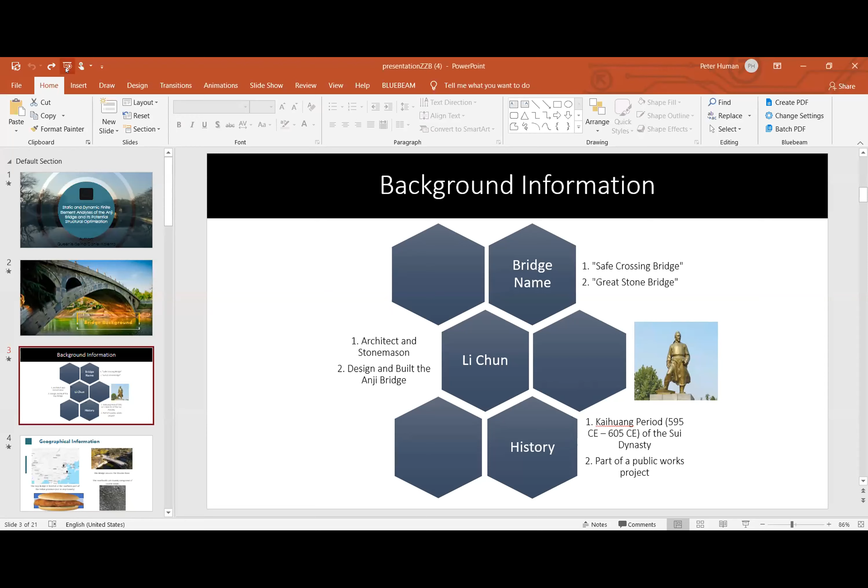All right, here we go. We have seen this slide. This is basically the bridge, and that's our topic. I'm going to talk about the background information of the bridge.

Now we start. So the bridge basically has two names. Some people call it Anji Bridge because the literal translation from Chinese is the safe crossing bridge. And also because the bridge is made out of a lot of stones, literally all the components are limestones, and they're compacted together, so it earns another name of Great Stone Bridge.

And also, we have this guy here. This guy is called Li Chun, and he's basically the architect. He built this bridge as well as planned everything about this bridge, and he's also considered, I guess, the father of the bridge.

And afterwards, we have the history of the bridge. The history is basically during the Kaihuang period, which lasts from 595 to 605 CE, and basically after the decline of the previous dynasty, they tried to restore the whole process of public works. So they built this bridge for everyone's benefit.

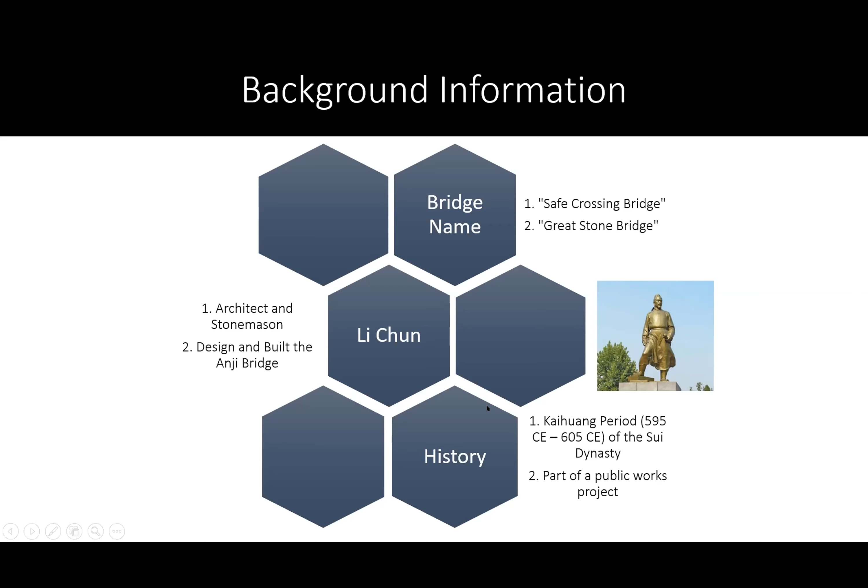Okay, now we have this geographical information here. So basically the bridge is located at Anji, in Hebei province. I've got no idea why this one doesn't work, it should play slide by slide, but

okay, so basically this is a map of China, right? And then now we have Hebei province here, and the Anji Bridge is located inside of it. And don't get confused, because there's another place also called Anji, located in Zhejiang province. Even though it's called Anji Bridge, it's because of its name of Safe Crossing Bridge.

And also, this bridge basically crosses the Xiaohe River, and by the bank side of the river, they have very coarse stones and sands, and they are very incompressible because they basically have a layer of silty clay as well as a layer of silty sand, distributed equally. And because of the property of the silty clay, it's very hard and incompressible. It basically supports the bridge quite well.

So even when it has experienced floods or earthquakes, it still won't fundamentally destroy it at the base, because liquefaction of the soil cannot happen. And unfortunately, I've got no idea why this slide doesn't work.

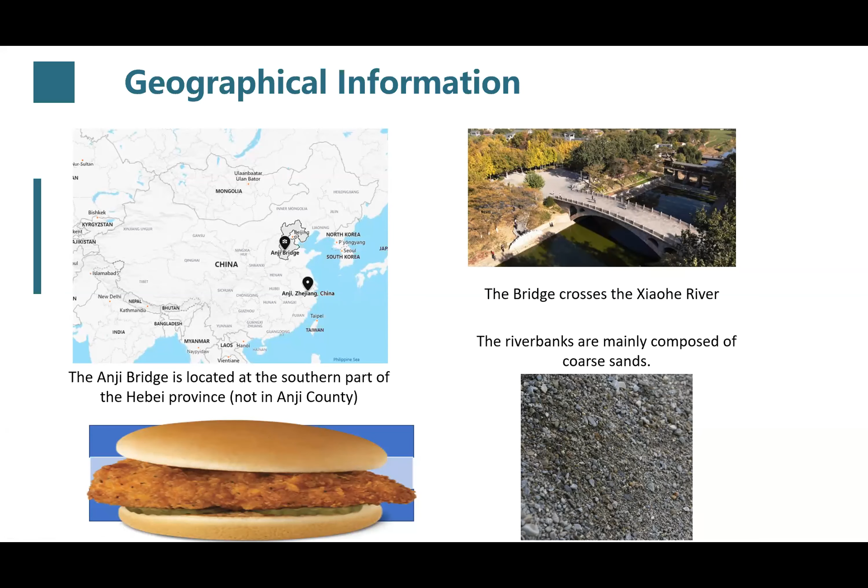And yeah, so if we have a bridge on top of this, and the silty sand and silty clays are incompressible, you can't compress them. So basically, they're going to be stable. The bridge is going to stay stable on top of it. And you can skip. I've got no idea, the slide doesn't work.

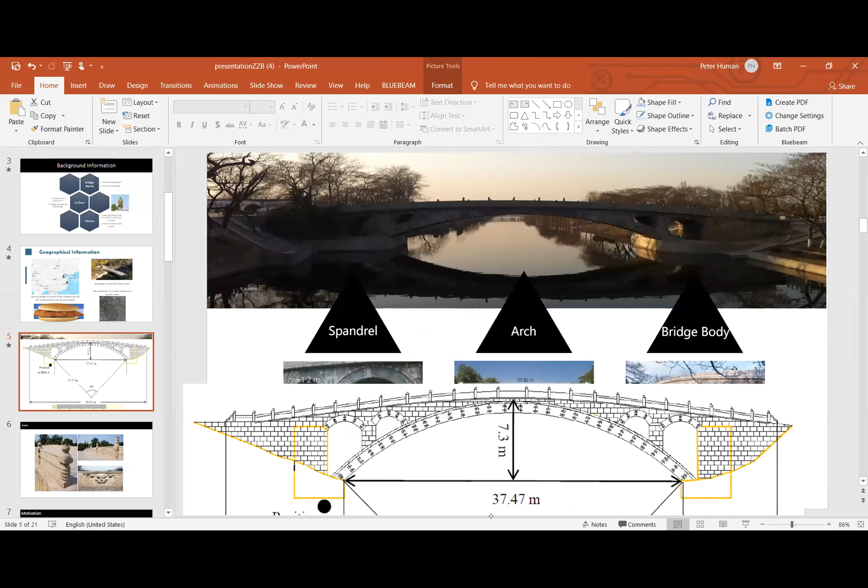Okay, so basically what we have here is our whole entire bridge. And I would like to talk about the spandrels. The spandrels basically are symmetrical. So we have both sides. On each side, we basically have two.

So we literally have four open spandrels, and they function quite well, because during 1,400 years of this bridge's history, there have been numerous floods. So the spandrels basically open up space for the water to pass through by almost 16.5%.

And also, this is a smart decision, because during an earthquake, you want to have less material. So basically, this saves about 7.85% of materials. Basically means 700 tons of limestone saved.

And I would like to talk about the arch. So the arc length is going to be 37.02 meters apart for the spans, and the height is going to be 7.23 meters. The width of the bridge doesn't really matter, but it's 9 meters.

So if we compare this bridge to another bridge which has a semicircular shape, this bridge only cuts an 83 degree angle from the whole circle. So if you were to imagine there would be a circle down here, this is only going to be 83 degrees of that angle.

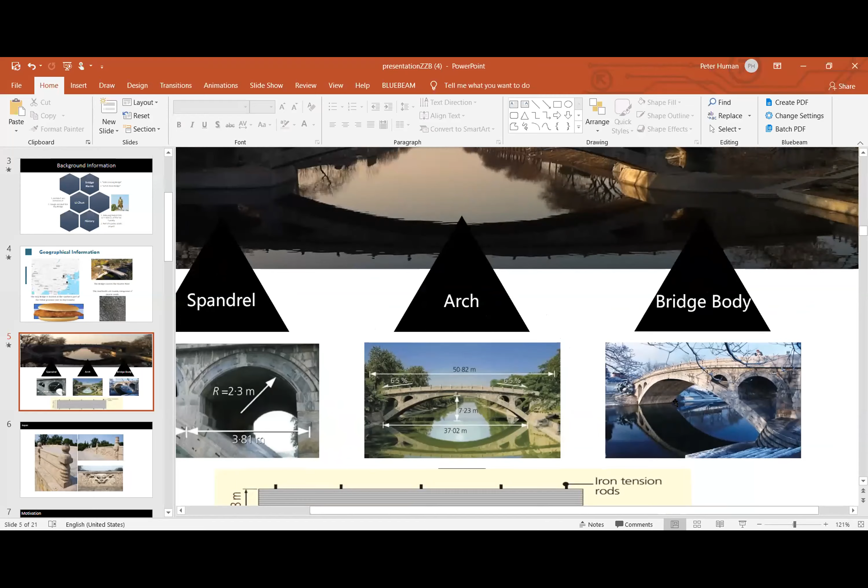And then I'd like to talk about the bridge body. So basically we have the bridge here, right? But if I were to zoom in, you could probably see the bridge has a lot of components. It's basically made out of 28 pieces of limestone, and they are compacted together. And we have another image here that shows it clearly.

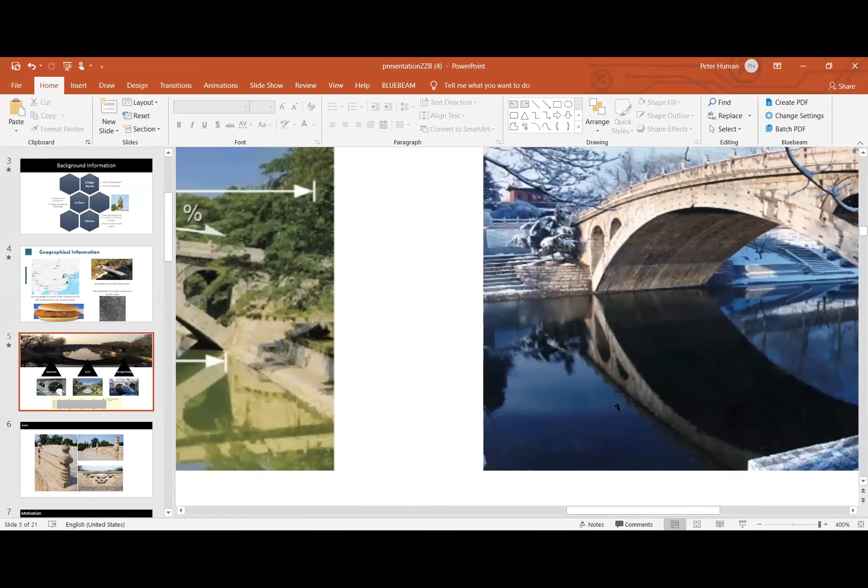So basically this is a bridge, right? And then they bend this bridge, but it's still going to be the same part. It's going to be 28 pieces of limestone, and it's going to be compacted with the iron tension rods.

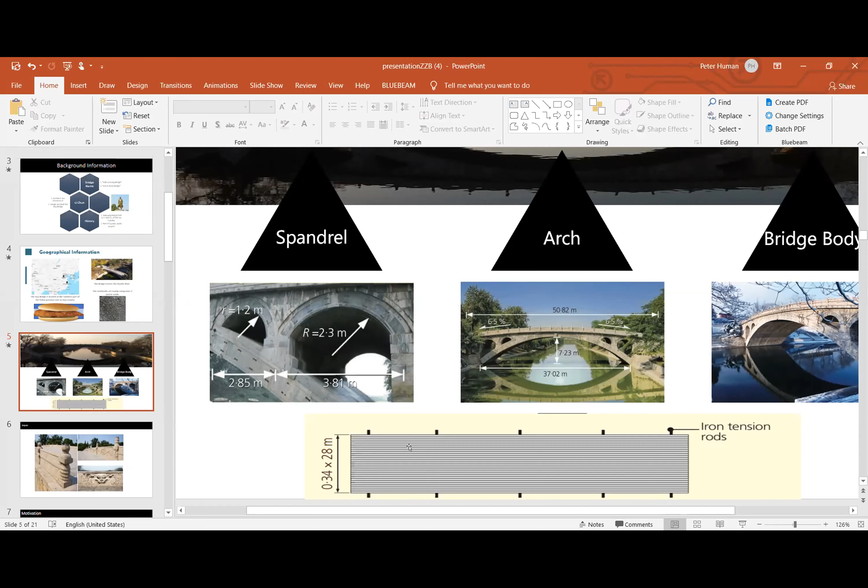So if they have this structure, it's a real advantage, because if one piece breaks, they can easily replace it as well as repair it. One piece breaking doesn't cause the whole structure to collapse.

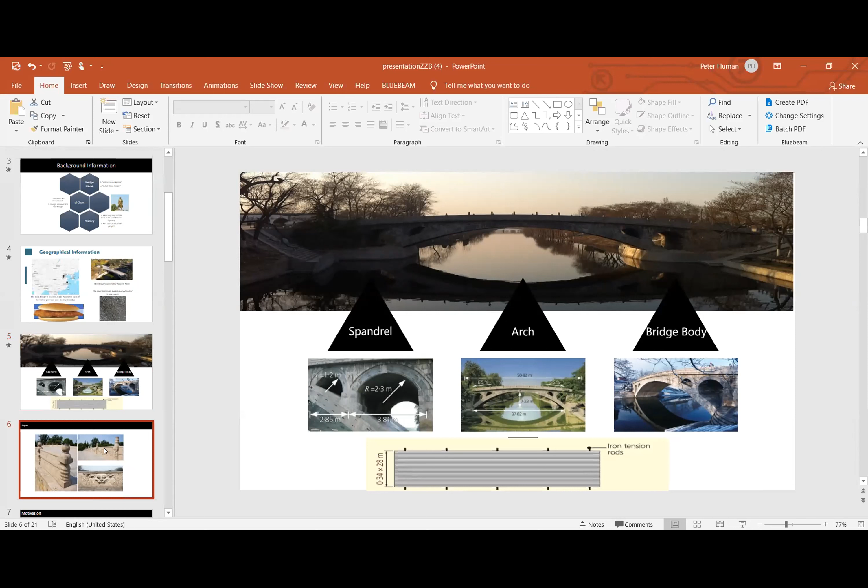And last, I will talk about the repair of the bridge. So the bridge is basically 1,400 years old, right? But this bridge is stable. It never collapsed. Even though they need more stones for repairs, there hasn't been any major issue with the bridge except the ornaments.

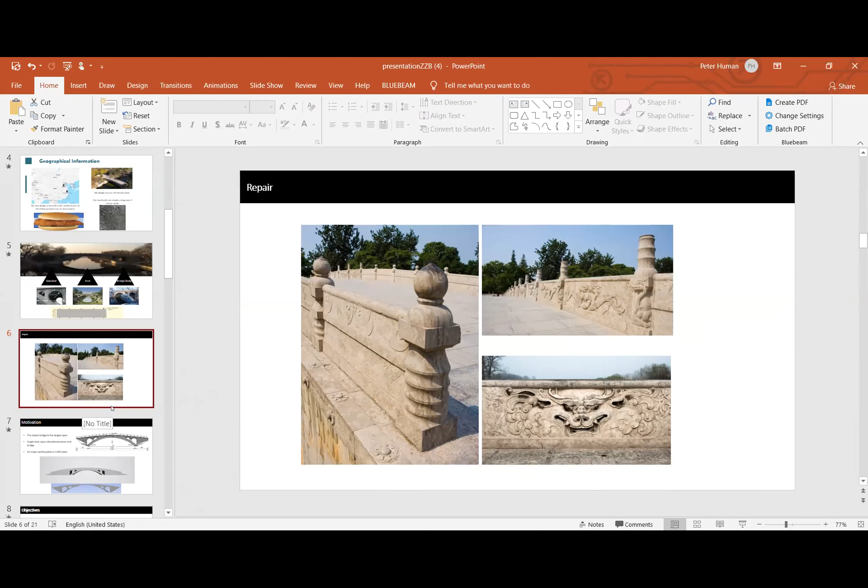So they replace those small parts, and they polish it about every 400 years, and now it just looks polished. So the bridge is quite stable, and that's a great advantage. That's basically why we're really interested. And Nina is going to introduce our objectives and motivations.

Okay, so I'm going to introduce the motivation of why we're doing this project. As Daniel just said, the Zhaozhou Bridge is widely renowned for its structural stability and resilience, withstanding 6 to 8 major earthquakes within these 1,400 years without experiencing major structural damage.

Yet we were surprised to discover that although the bridge has a high reputation and is widely known, it remains really mysterious, and there is an abnormal deficiency in relevant documents analyzing its basic physical characteristics. And the exact time when it was built is still controversial, let alone research into its mechanical performance.

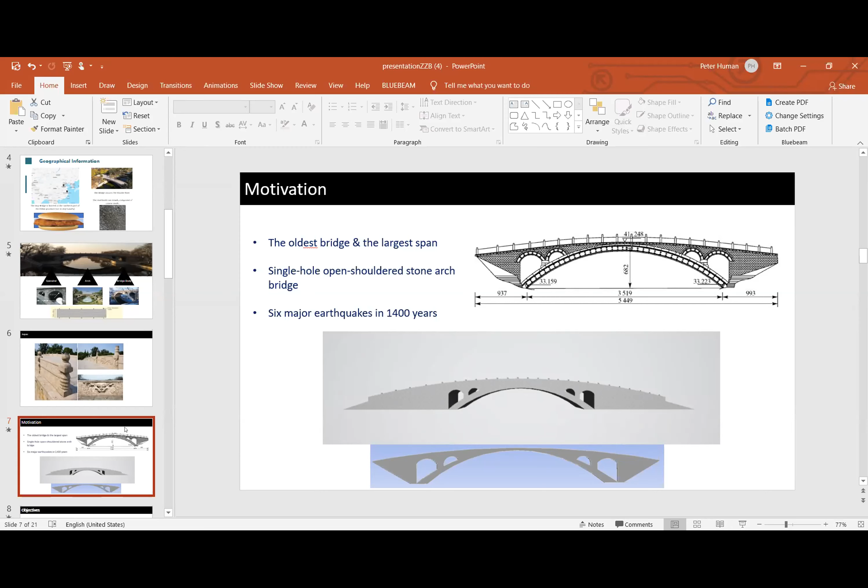So in order to better comprehend its structural ingenuity and structural intelligence, investigation has to be conducted by ourselves. And we expect, while we are appreciating its extraordinary seismic capacity and resilience, we can still give suggestions on possible improvements, even though we think the structure is nearly impeccable.

So overall, our findings can be a reference for better conservation of this ancient architectural treasure. And maybe we can give some suggestions, and the suggestions we give from our analysis can also be a guideline for future arch bridge design and construction.

And since the rigidity of the soils around the base of the bridge lacks authorized confirmation, out of academic rigor, for every stage of the subsequent analysis, 2 different cases have been considered. Case A sets the sides of the bridge, the piers, as free nodes, assuming the surrounding soil is soft and unsupportive, whereas case B sets them as fixed nodes, assuming the soil is rigid and supportive.

So Colenso will mainly investigate case B, followed by Queenie, who investigated case A. So I guess Colenso will share his study of this bridge.

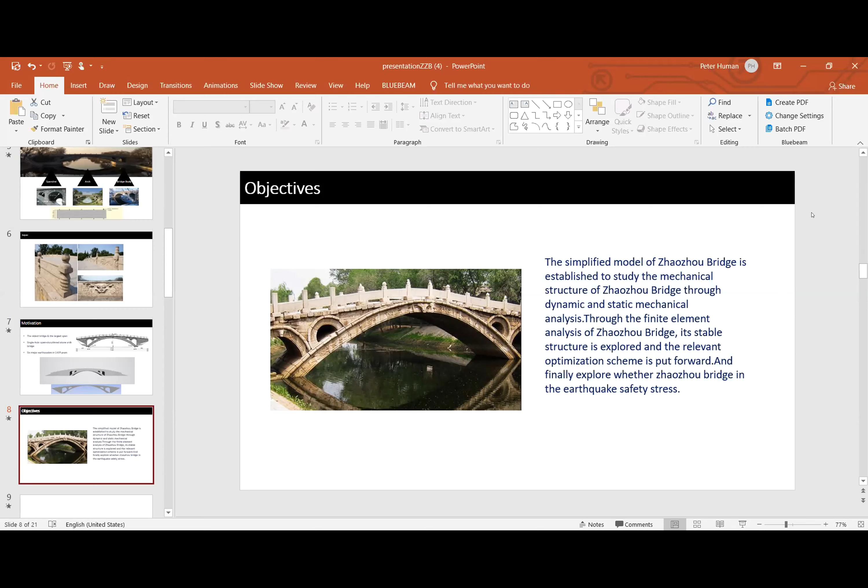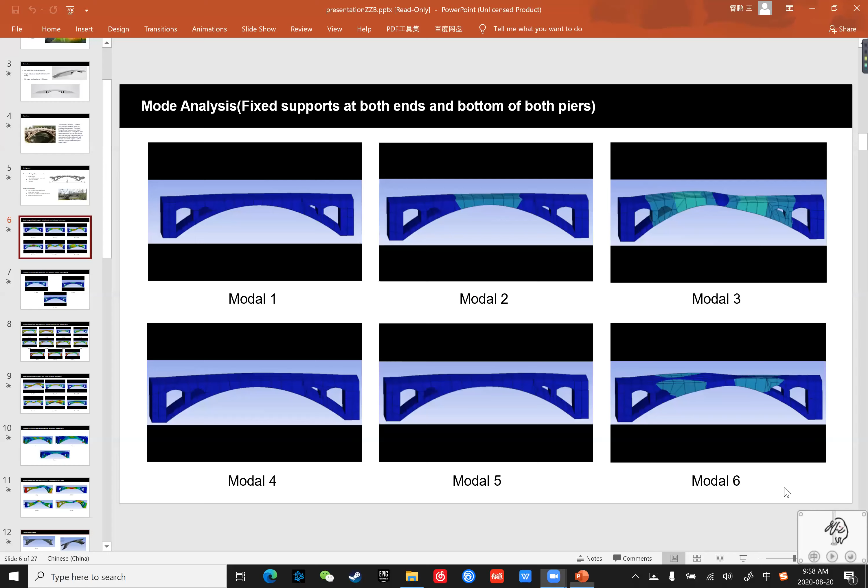So I will introduce the data obtained after fixing the left and the right ends and the ground of Zhaozhou Bridge. And I think we will introduce the data of only fixing the ground of Zhaozhou Bridge later. So I want to start by showing you 6 live pictures of modal analysis in action. These live images are the results of analysis of each model.

The red area indicates that the stress of this model is relatively high, while the blue areas indicate that the stress of the model is relatively low. Although the structural deteriorations represented by each diagram are exaggerated, there is actually no discernible change. After this, we could look at modal 4 to 6.

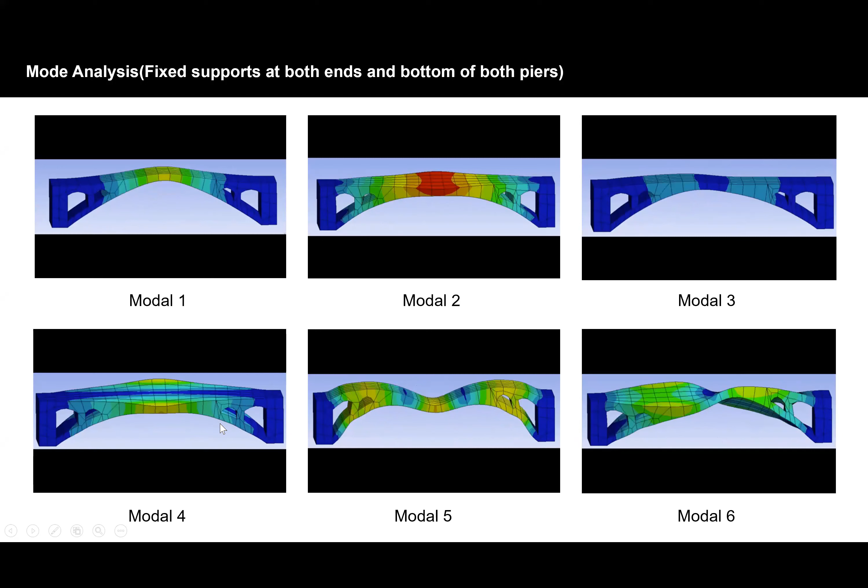Modal 4 to 6, when the stress cloud map changes greatly and the approximate frequency range is within 30 Hz, the whole is a deteriorated state. This is because the local seismic frequency of Zhaozhou Bridge is about 27 Hz. So you can see it experienced the earthquake in modal 4 to 6.

In addition, by comparing our data, I think it's about 0.11 millimeter displacement change. It can be seen that the earthquake has no substantial harm to Zhaozhou Bridge, and the overall model structure of Zhaozhou Bridge is still very safe and stable.

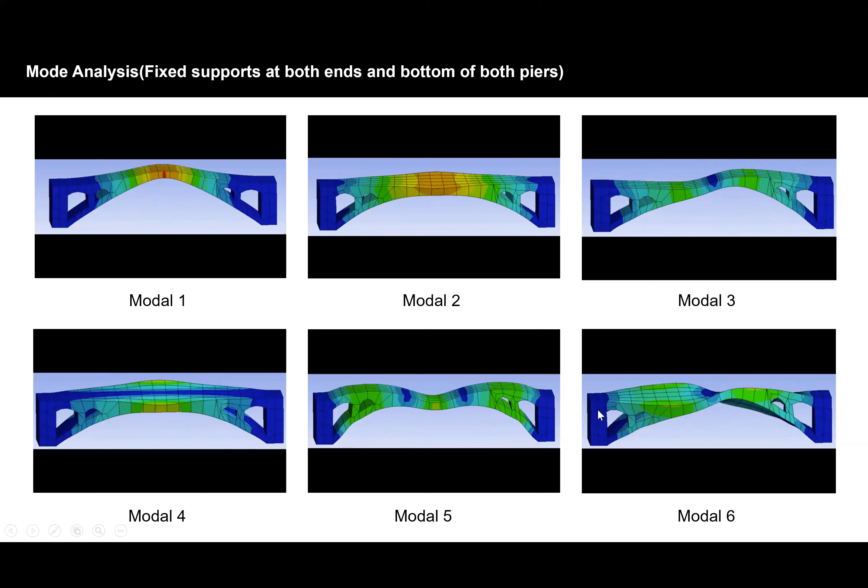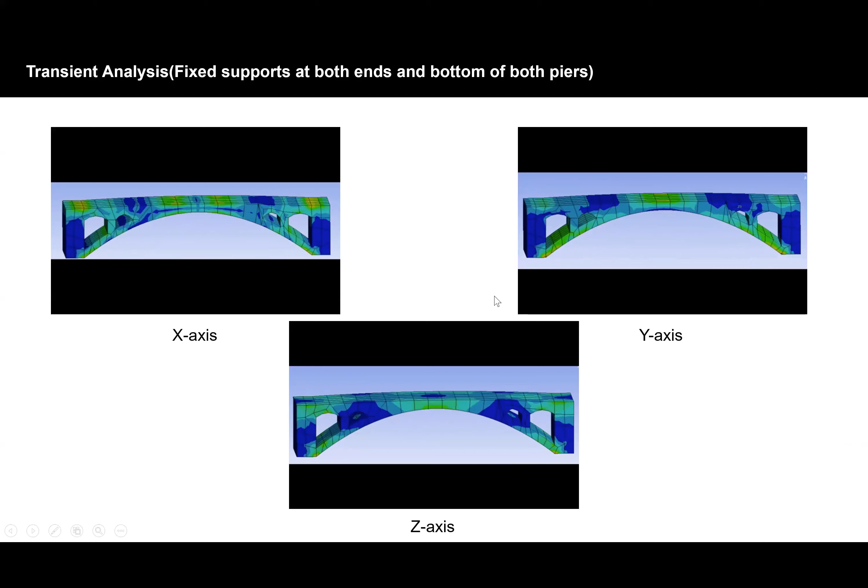Next, I would like to show the force diagram obtained by adding acceleration in 3 different directions. So let's start by looking at the picture on the left, which is the stress cloud in the x direction. It can be seen that the minimal stress is at the pier, where two fixed surfaces are located, and the maximum value is mainly distributed on the bridge deck.

It can be observed that some arched connection points of the bridge and the bridge deck produce greater stress, and the stress generated by the big arch is larger than that by the small arch. But these stresses will not affect the stability of the bridge because the stress on the bridge is not as great as the stress on limestone.

Now, let's look at the live image on the right along the y-axis. The minimal stress is still at the bridge pier, and the small arches are connected to a thicker area in the center of the deck, which can also reduce the stress. In contrast, the large arches and the underside of the pier will generate greater stress because the dynamic load on the y-axis is added from the top down.

Compared with the stress value on the x-axis, the maximum value on the y-axis is obviously a little larger, but the conclusion is that the maximum stress has no significant influence on the stability of the bridge; the reason is similar to the x-axis mentioned above. Finally, I will introduce the stress change diagram in the z direction.

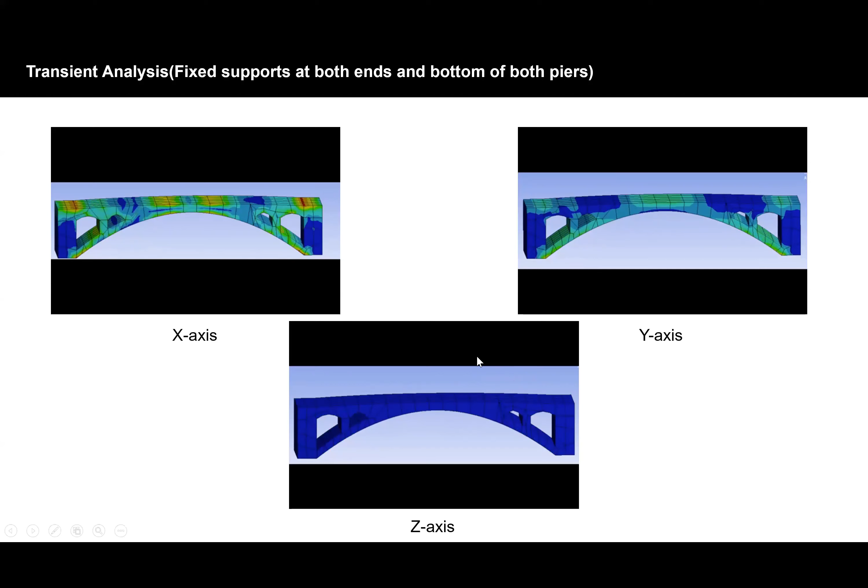And then I'm going to introduce harmonic analysis. And I'm going to show you what happens to total deformation from 0 to 100 Hertz. I think this live image might make my slide a little stuck. But the important thing is if we observe these live images carefully, we can find that the bridge is shifting in 3 different directions. This is because we added 3 waves in different directions to the bridge to simulate the seismic process of Zhaozhou Bridge.

Compared with the dynamic load analysis, it can be found that the bridge body mainly resists the dynamic load, and the design of the pier is to prevent the bridge from earthquake damage. The maximum deformation stress is always less than the maximum allowable stress, and the maximum value of total deformation is also within the basically intact range of the bridge, so it is safe.

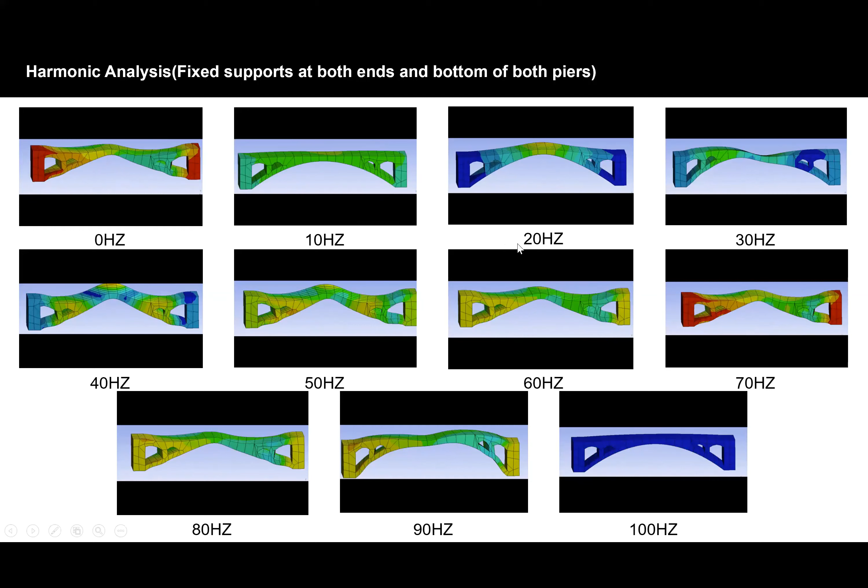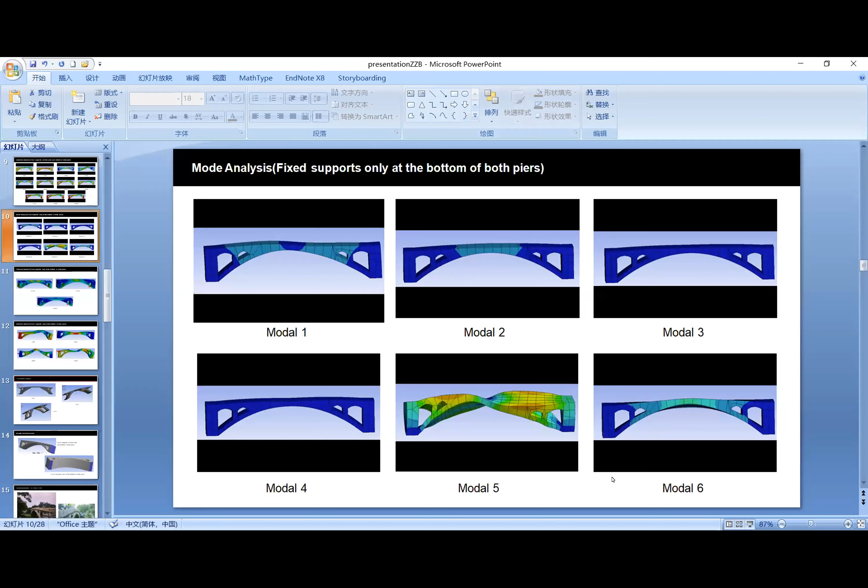Next, Queenie will show her results. So can you see my screen? Yes.

So if the soil on the left and right sides of Zhaozhou Bridge is much softer than the bridge body, then both ends of the piers can be set free, and the fixed supports are only at the bottom of both piers. And next, perform modal analysis on the model, and the contour figures of the total deformation of the first 6 modes will be shown on the screen.

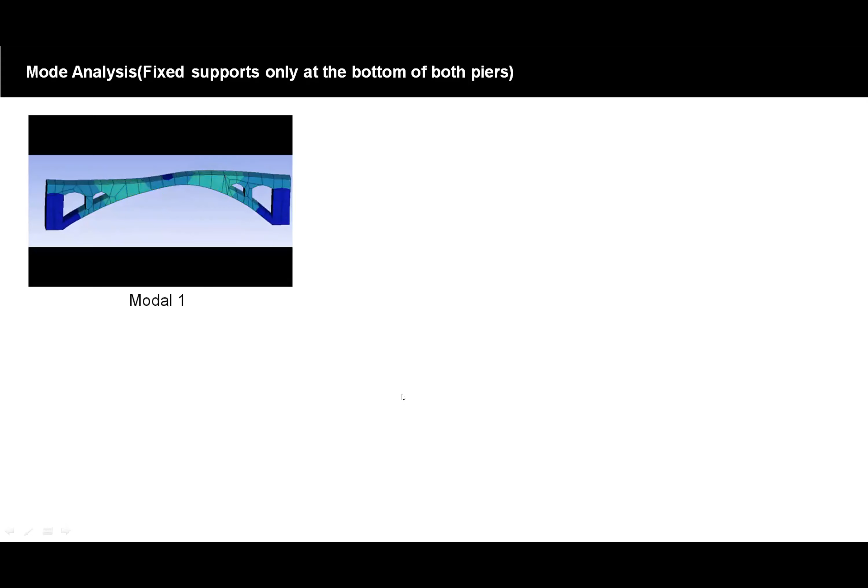The maximum displacement of the first order mode is distributed on both sides of the middle of the bridge in the x direction, and the displacement is in the xy plane, and the mode looks like a sine function within a period. The maximum displacement of the second mode is in the middle of the bridge, and the displacement is in the xz plane. The maximum displacement of the third mode is also in the middle of the bridge, and the displacement is in the xy plane. The mode looks like a cosine function within one period.

The fourth order mode is a little more complex than the third mode, and the displacement is also located in the XY plane, but its mode looks like a cosine function in two periods. The maximum displacement position of the fifth order mode is similar to that of the first mode, but its displacements are not only in the XZ plane, but also in the XY plane. And the mode looks like twisting a towel, right?

And in the sixth order mode, the maximum displacement appears on both sides of the middle of the bridge in Z direction. And the mode looks like applying a moment at the middle of the bridge in X direction. According to the results, the maximum displacement always appears in or near the middle of the bridge.

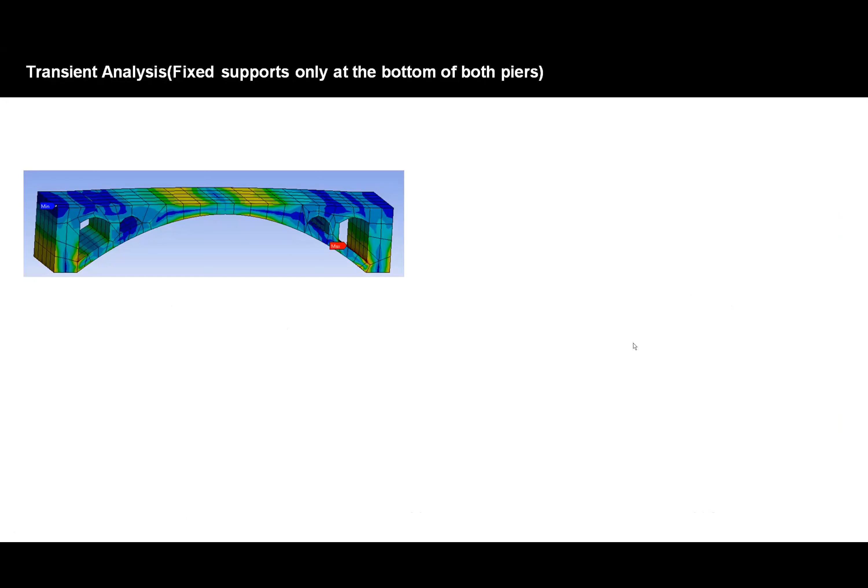And next, perform transient analysis on the model. Simple harmonic functions can be used to simulate seismic waves. So firstly, the acceleration in the form of 100 multiplied by sine pi t is applied in the three directions of x, y, and z respectively, which can simulate a magnitude 8 earthquake.

The contour figures of equivalent stress are shown on the screen. In this case, the maximum of equivalent stress appears at the position where the toe of the main arch is fixed to the bridge section, and it is less than the allowable stress, so it's still safe.

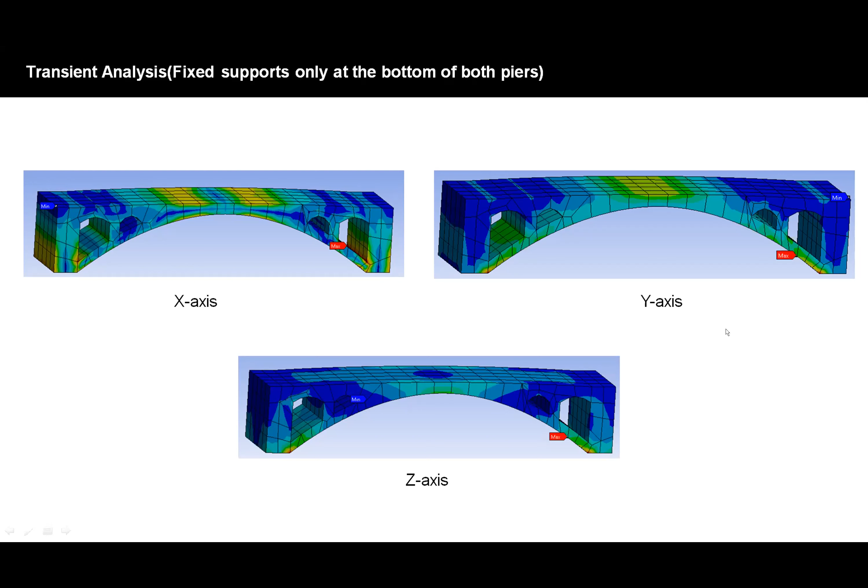And then set the applied frequency range to 0 to 100 Hertz and apply forces of 100 Newton in X, Y, and Z directions together. Simultaneously apply simple harmonics in the three directions.

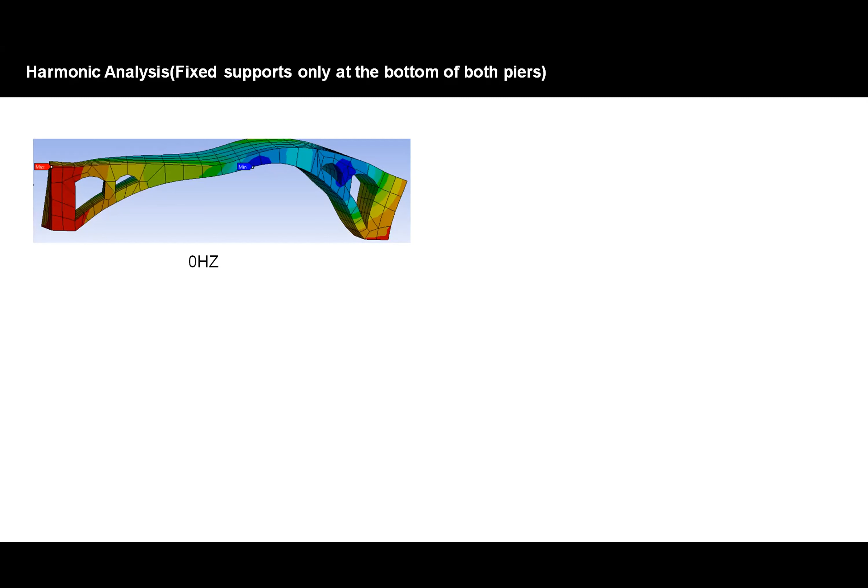From frequency response analysis, when the applied frequency is at 20 Hertz, the amplitude of stress on the bridge deck reaches its maximum value. And when the applied frequency is about 30 to 40 Hertz, the phase angle abruptly decreases from 180 degrees to 0 degrees. So we just focus on the analysis of total deformation when the applied frequency is 20, 30, and 40 Hertz.

It can be seen from the contour figure that when the frequency is 20 Hertz, the total deformation reaches the maximum on one side of the middle of the bridge in Z direction. And the maximum appears when the frequency is 30 Hertz. When the applied frequency increases from 30 Hertz to 40 Hertz, the deformation in the bridge changes from upward bending to downward bending, which also corresponds to the drastic change of the phase angle from 180 degrees to 0 degrees.

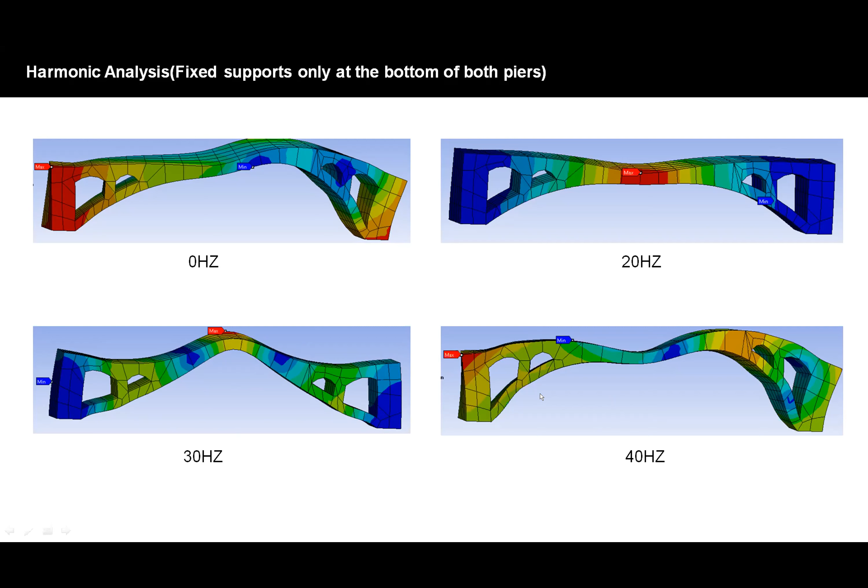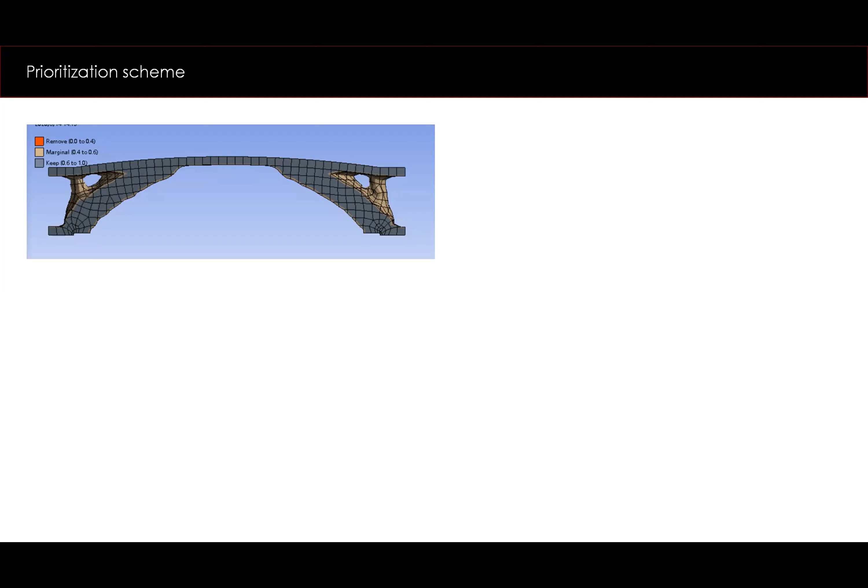And then we are curious about whether the structure of Zhaozhou Bridge could continue to be optimized. So we build a new model like a cuboid, but which removes the arch structure, and the bottom of the piers of the model is fixed to the ground, and the standard gravity acceleration is applied to it. Then a force of 10,000 Newton is applied to the upper face of the model.

We select the optimization objective as volume, and the retain percentage was 20, 15, and 10 respectively. And the pictures are shown on the screen. When the retain percentage is 20, the optimized structure is similar to Zhaozhou Bridge, but the pier part is thinner. And there is only one small arch left on both sides of the bridge.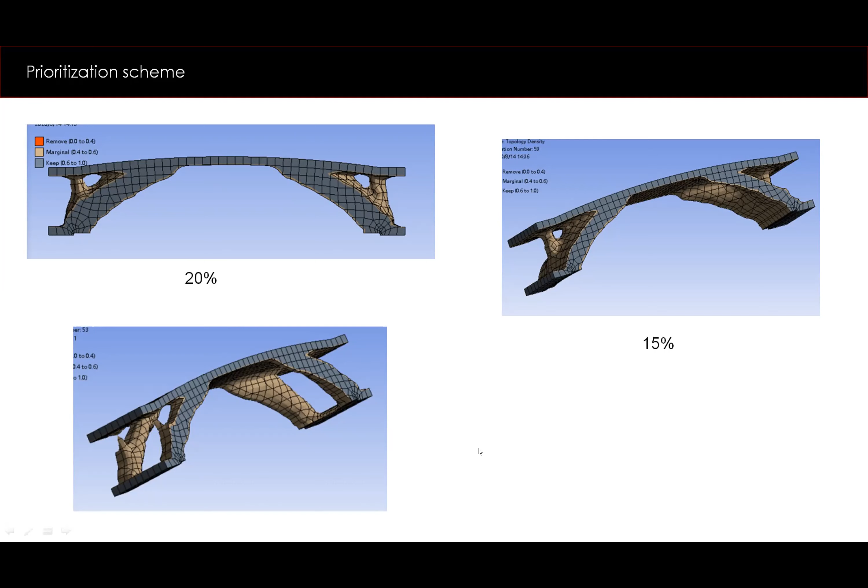And then let's get the summary. This picture is the case that Colanto shows, and this case is what I have shown. When fixed supports are at both ends and the bottom of both piers, the vibration mode of the bridge is between the 5th and 6th order modes when earthquake occurs. The maximum displacement occurs in the middle or both sides of the middle of the bridge in X direction. The displacement of the bridge is both in XY plane and XZ plane, which looks like twisting a towel along the X direction.

When fixed support is only at the bottom of both piers, which can be used to simulate the case that the soil on both ends of the Zhaozhou Bridge is very soft, the vibration mode of the bridge is close to the 6th mode when earthquake occurs. And the maximum displacement is near the two sides of the bridge in Z direction. The middle part of the bridge is twisted along the X-axis. But whether both ends of piers are fixed to the ground or not, the maximum displacement is quite small relative to the scale of the bridge body, so it is safe.

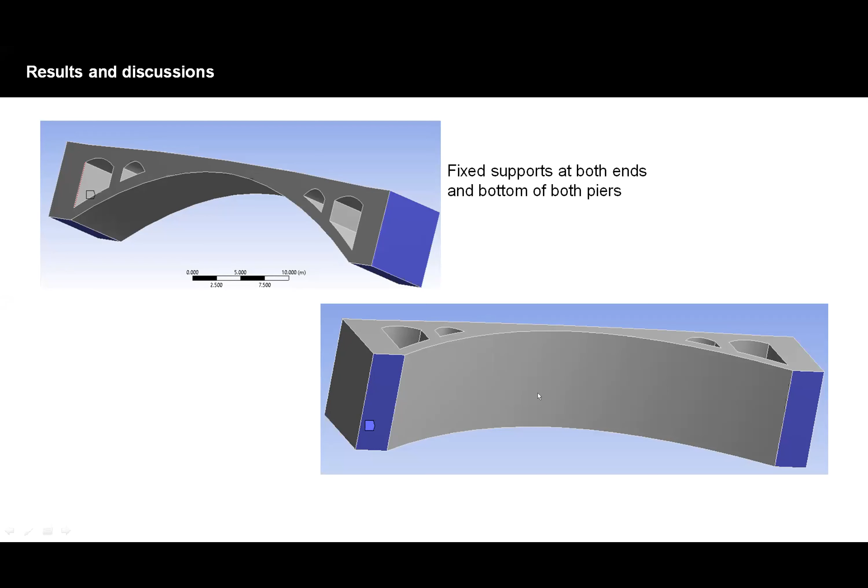Okay, so from the analysis Colento and Queenie did, we found that by inspecting the nephograms of transient response in X, Y, or Z direction, the maximum equivalent stress all appears at the inner side of the bottom of the piers or the intersection areas where the foot of the main arch meets the foot of the piers. So we think consolidation of this part of the structure is considerably necessary in order to further increase its seismic ability and to bear more destructive seismic waves.

And additionally, the stress is noteworthily concentrated on the surface of the deck, like the middle part. Oopsie. Okay. Where am I up to?

On the surface of the deck, as well, since the middle part of the bridge is thin and lightweight. So we're thinking about maybe reinforcements on the middle part of the bridge using light materials so that it doesn't affect the overall weight of the bridge itself, while the stress it bears can be more spread out. These are possible recommendations we can give, and it might be a useful guidance for future conservation of the Anji Bridge and refinements on its structure.

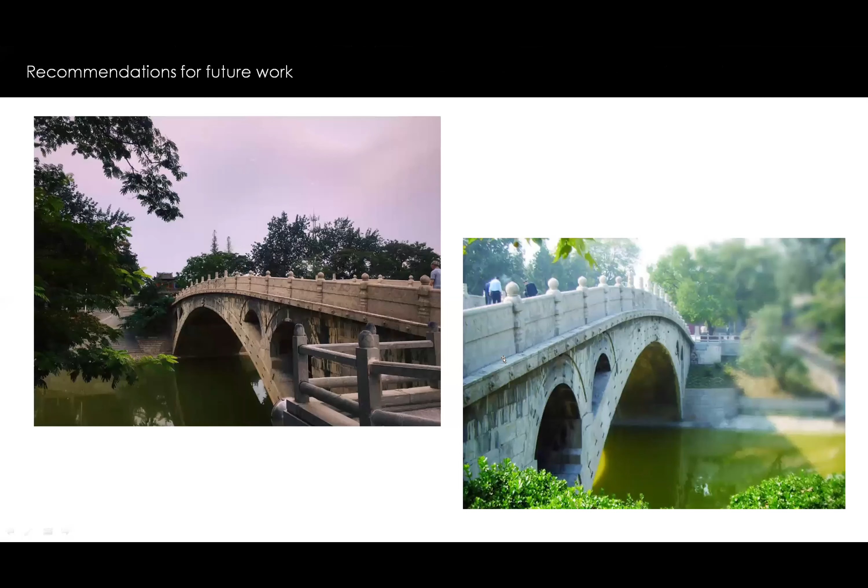I have one minor question for Queenie. You showed your modal analysis, and it seems to me that mode number 1 appears more complicated than mode number 3. I wonder if you can show your slide there. Your modal analysis. This one? Yes, I think so. If you can animate it.

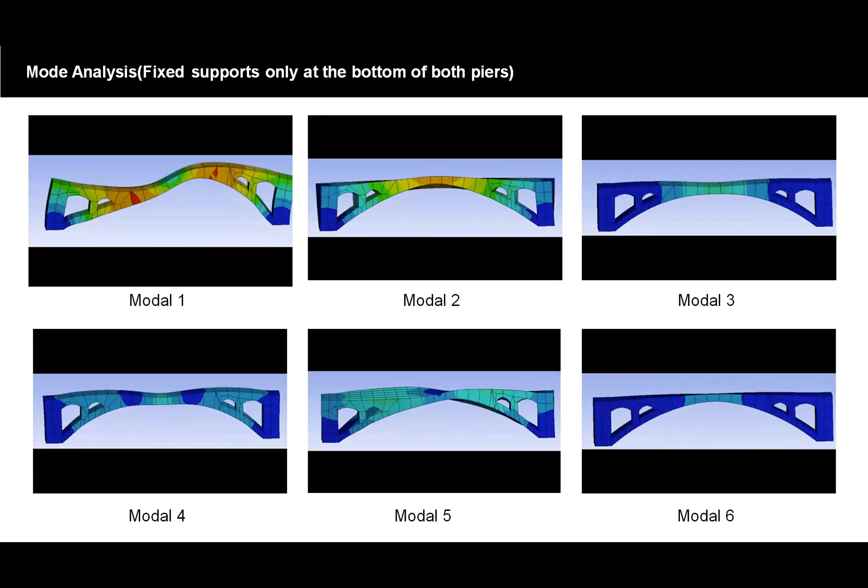Okay, so my question has to do with mode 1 and mode 3. Mode 3 has a symmetric deformation. Mode 1 has what's called antisymmetric. You can see there you define a full wavelength with the antisymmetric, whereas for mode 3 you only have half of the wavelength. It seems to me that mode 3 is simpler than mode 1, so I would expect that mode 3 would be 1 and 1 would be 3, perhaps. But maybe there are some other deformations that I'm not seeing.

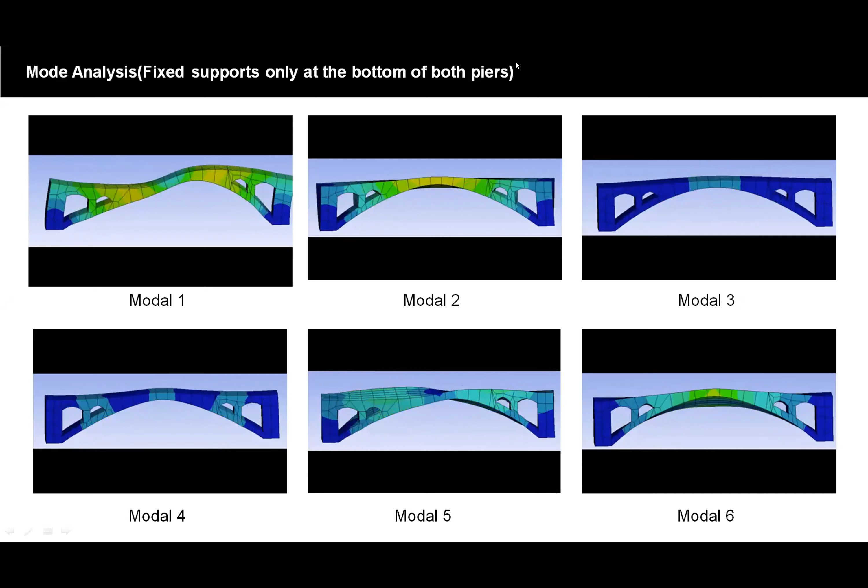Just one minor comment. You see what I mean, right? Yes. I think it's my technical problem. I put the picture wrong. Maybe there is another displacement there that we are not observing. Maybe mode number 3 is also experiencing sidesway motion that we are not seeing from this animation. But very nice animations. Maybe it's about the angle that we see the model. In this angle, it looks quite simple. Yeah, maybe there's some complicated mode. Yes.

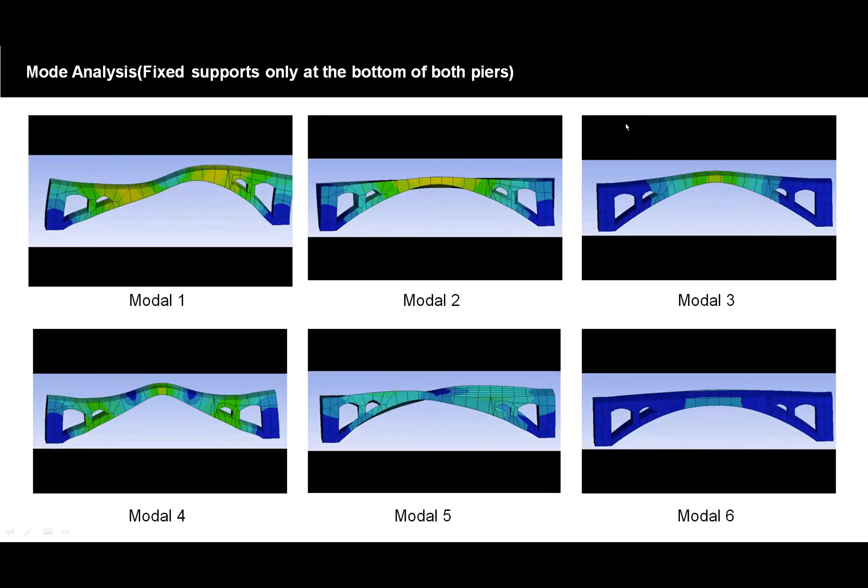That's it. Anyone have any question for the second group? Yeah, I just want to make sure, because I was taking notes: when you applied seismic frequency on the bridge, for example 10 hertz, the maximum point occurs at the middle. But when you apply 80 hertz, the maximum point occurs on the two sides. Is that because the frequency you applied is in the form of a sinusoidal function, so the maximum strength or deformation occurs at different points?

I think so. When we do the function, I put sine times pi times t, so we connected the deformation with the time. That gives us a result about amplitude with the frequency, which we can see from those live images. They show some red points, which are the maximum stress points. So that's just like you said. Okay, yeah, thank you.